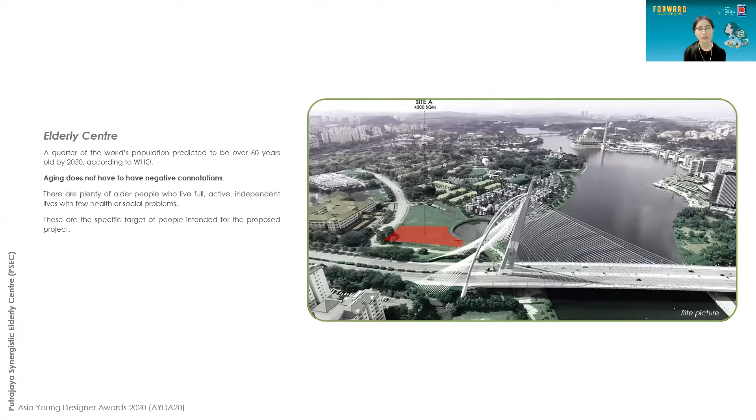A quarter of the world's population is predicted to be over 60 years old by 2050, according to WHO. But aging does not have to have negative connotations. There are plenty of older people who live full, active, independent lives with few health or social problems. These are the specific target of people intended for the proposed project.

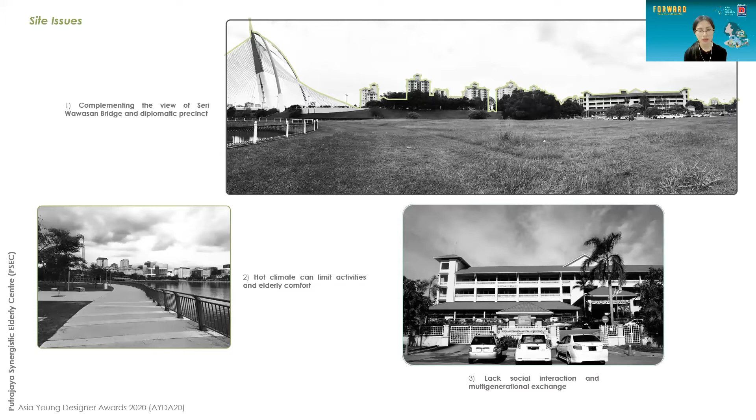The site is located at Putrajaya, overlooking Seri Wawasan Bridge and the diplomatic precinct of Putrajaya. The site issues are how to complement the view of Seri Wawasan Bridge and the diplomatic precinct, the hot climate which can limit activities and hinder elderly comfort, and the lack of social interaction and multi-generational exchange within the site.

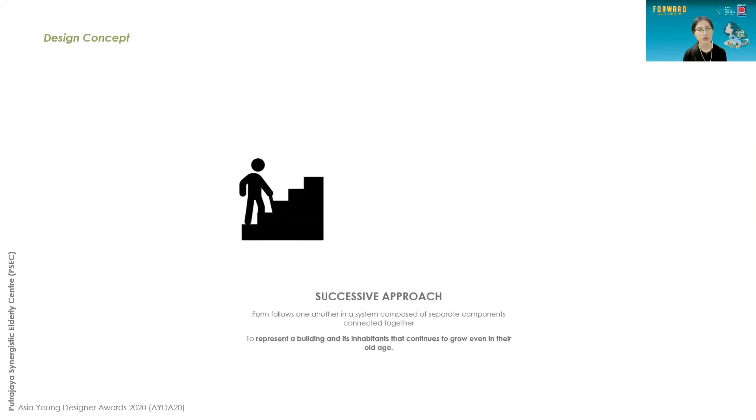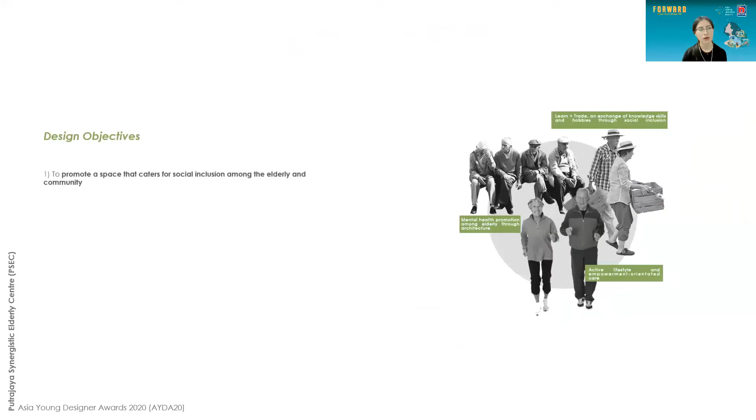The design concept is to have a successive approach in which form follows one another, in a system composed of separate components connected together. This represents a building and its inhabitants that continue to grow even in their old age. The design objectives are to promote space that caters for social inclusion, to promote active aging, and to promote empowerment-oriented care by defining an inclusive program which consists of the active spaces, learn and trade, and the clubhouse program.

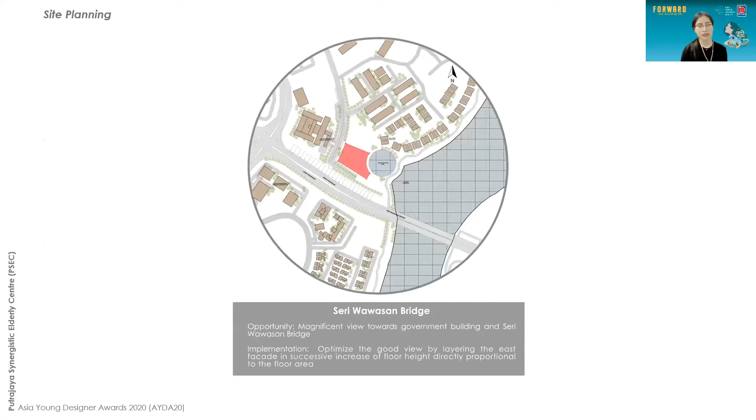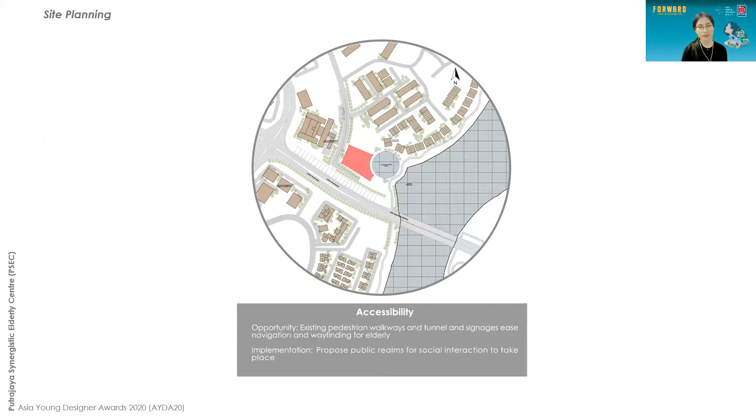The site planning starts off by optimizing the good view by layering the east facade in successive increase of floor height. Then we propose public realms to complement the existing pedestrian walkways, tunnels, and signages. Then we propose ground floor parking for ease of access and convenience.

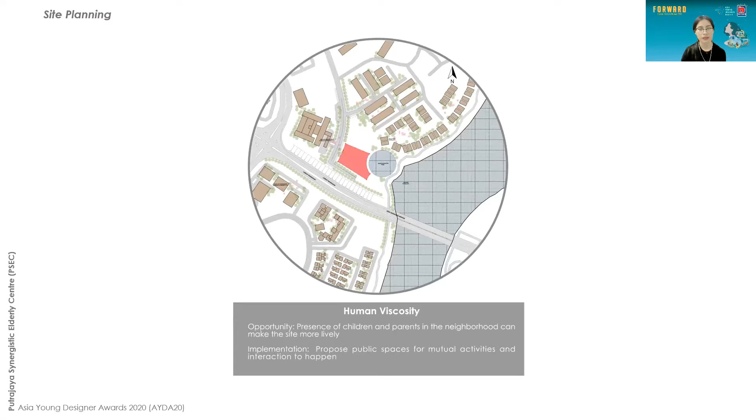Then we propose public spaces for mutual activities, because we have this presence of children and parents in the neighborhood, and this can be a very good opportunity to make the site more lively. We just have to provide a space for that to happen. Lastly, we propose planting more trees in the surrounding area and also on top of the roof.

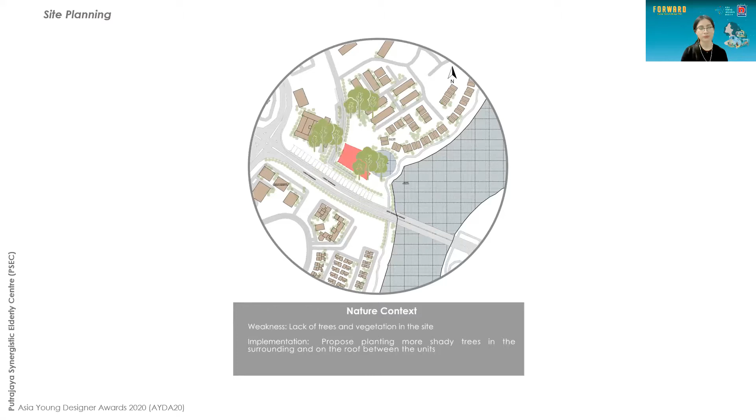The massing development starts by zoning two-fifths of the volume for elderly residences and three-fifths for social spaces and public spaces. Then we apply successive stacking by layering the east facade. Then we have this units division to accommodate for residential units.

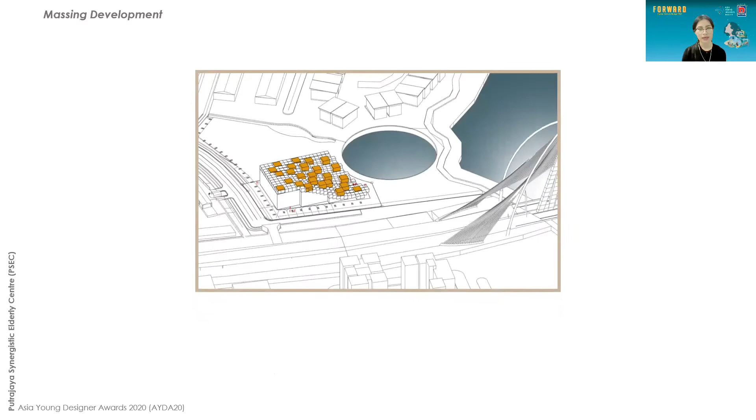Then we implement a curved surface for jogging and walking track implementation, and on top of that surface, we have units dispersion. Lastly, a green roof to incorporate nature into the inhabitants' lives.

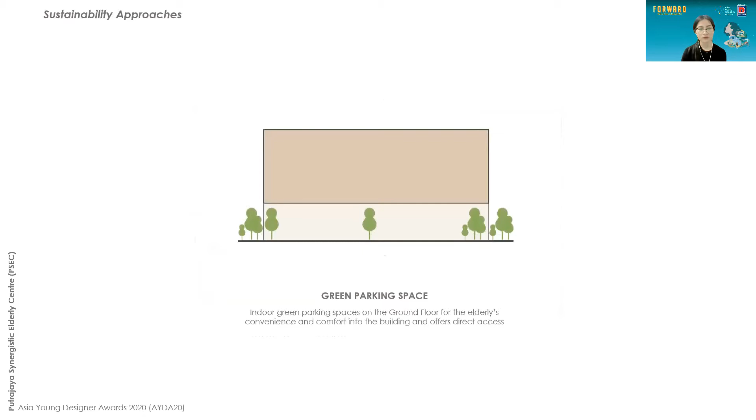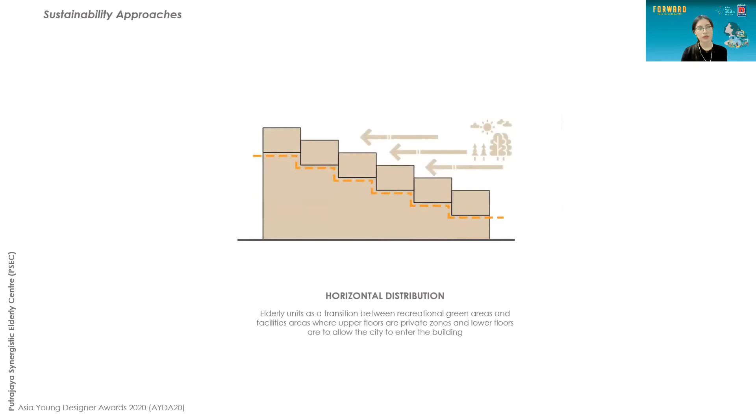The sustainability approaches include a green parking space for convenience and comfort into the building, offering direct access. The slope roof is to maximize roof area for interactive spaces. There is separation of the private residences and the public spaces on the lower floors by horizontal distribution, and rainwater harvesting is one of the approaches.

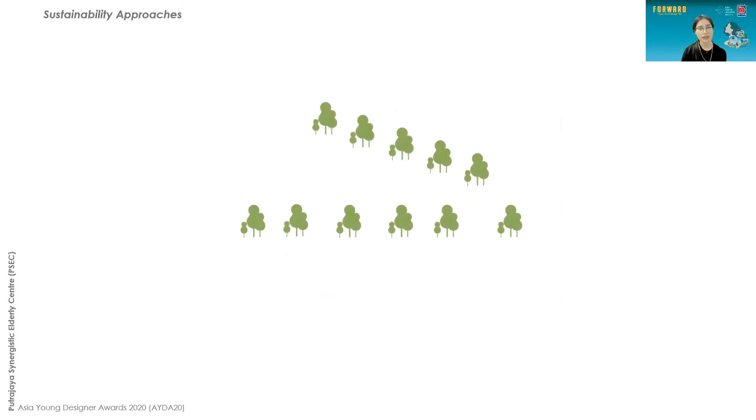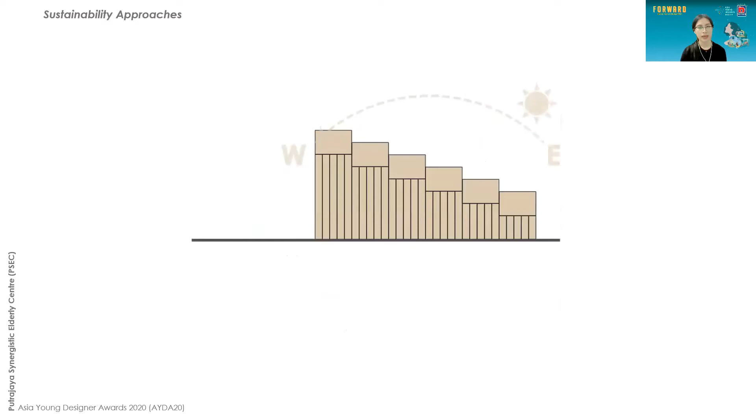The greenery's implementation is not just for natural shading, it's also to regulate the heat of the internal environment of the building. Then the proposed zigzagging curtain wall is to further aid the building's energy efficiency and for solar shading.

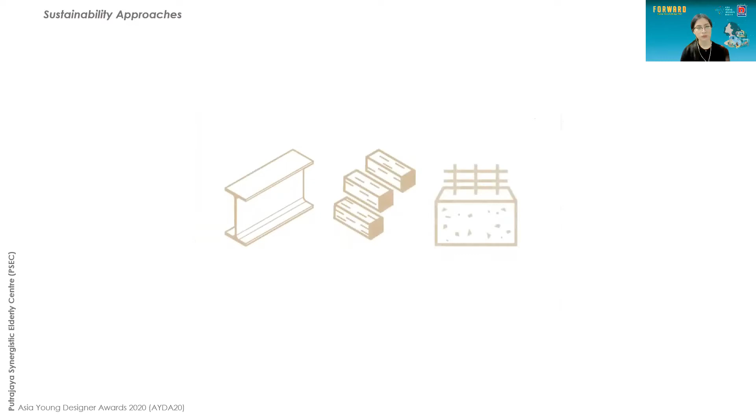The materials used are materials that are robust and durable. Then we have the prefabricated units that sit on top of the concrete structure.

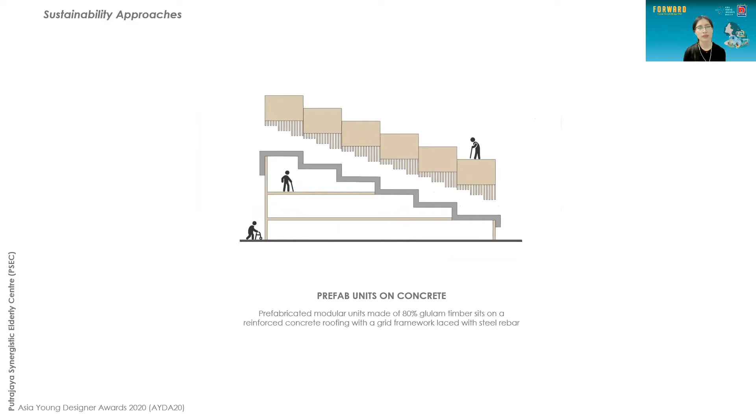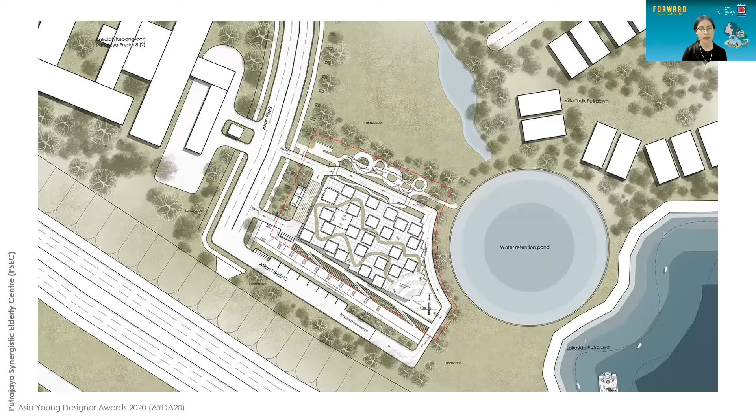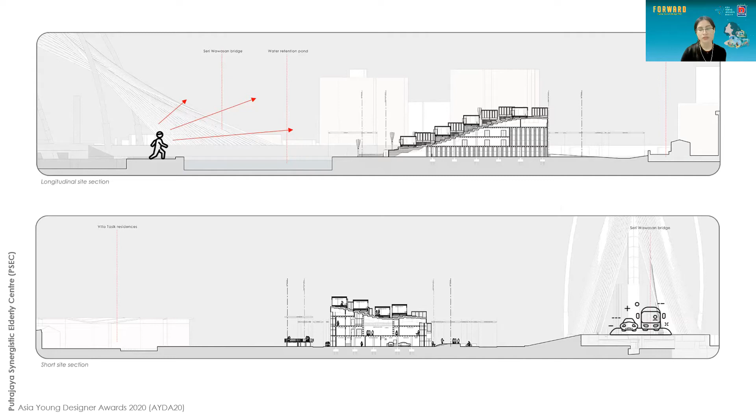So in case of traffic jams, or for people walking there, this is the view that they can see of the building. And this is the view from across the lakeside.

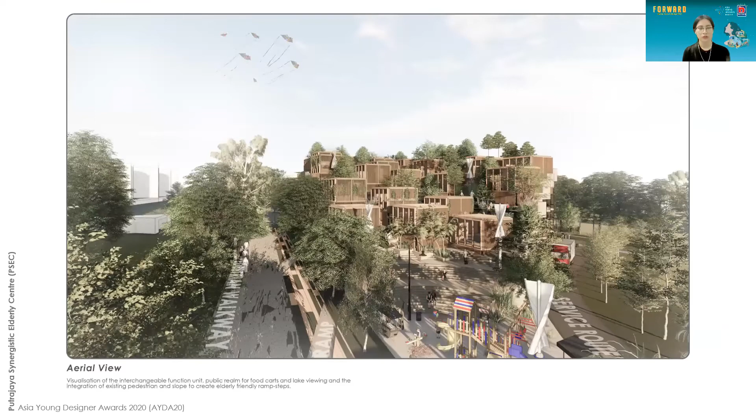This is the aerial view that shows you the ramp staircase and then the amphitheater staircase for social spaces, gatherings, and public realm. And this is the horizontal aerial view.

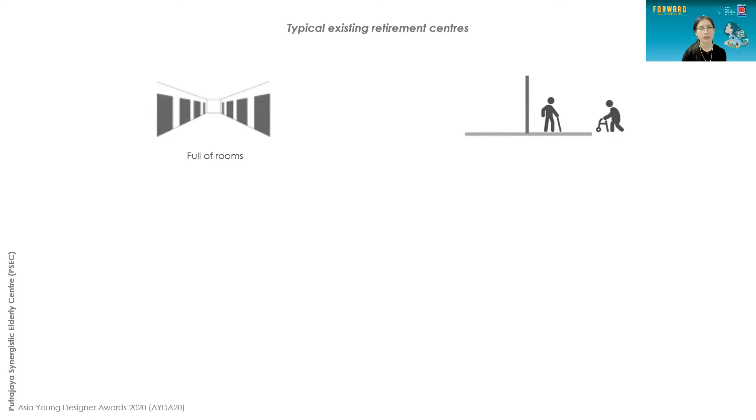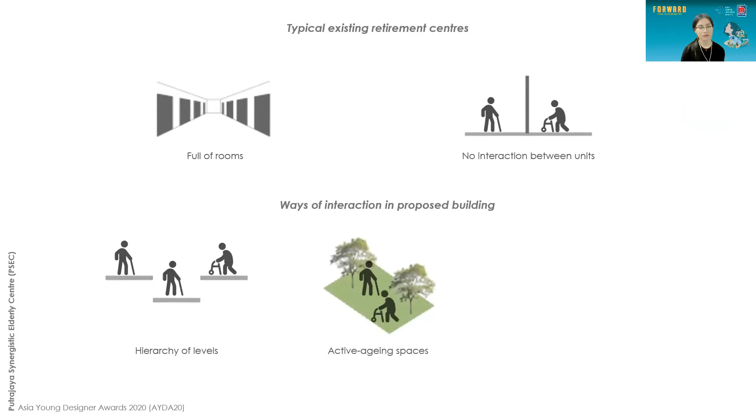A typical existing retirement center is full of rooms with no interaction between units. So the ways of interaction in this proposed building is to have a hierarchy of levels and many active aging spaces and green spaces in between units for them to socialize.

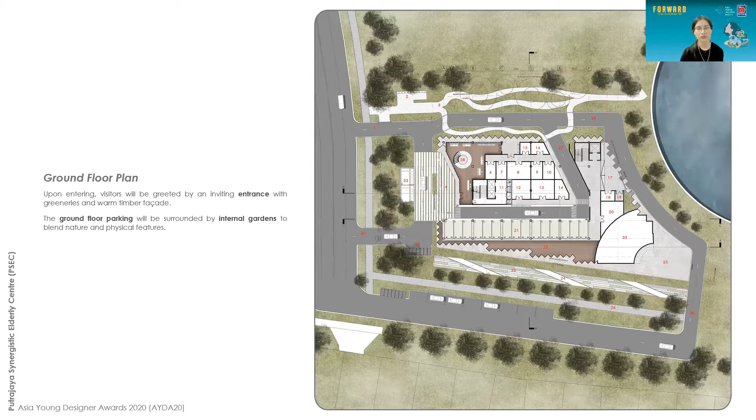This is the way for visitors to go in and out, and this is for visitors to access the ground floor parking and exit. This one shows you the services route for the entire building.

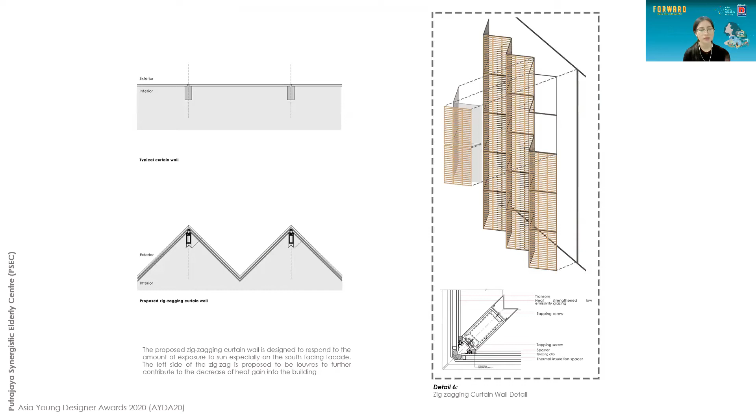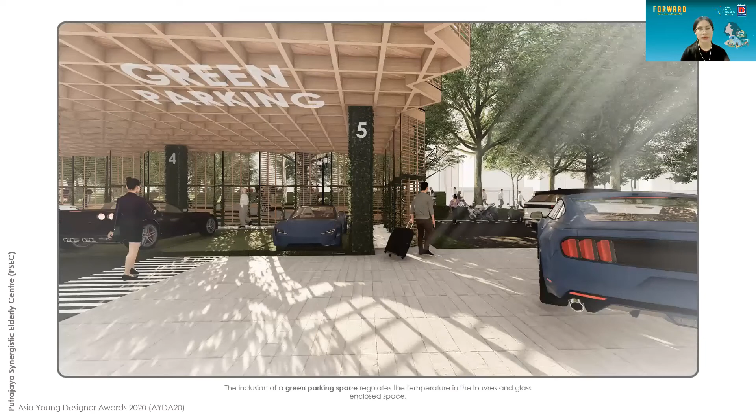The proposed zigzagging curtain wall is designed to respond to the amount of exposure to sun, especially on the south-facing facade. This is the spacious entrance that caters for a cycling path and shaded pedestrian walkways, including a green parking space and a ramp staircase for people with different abilities.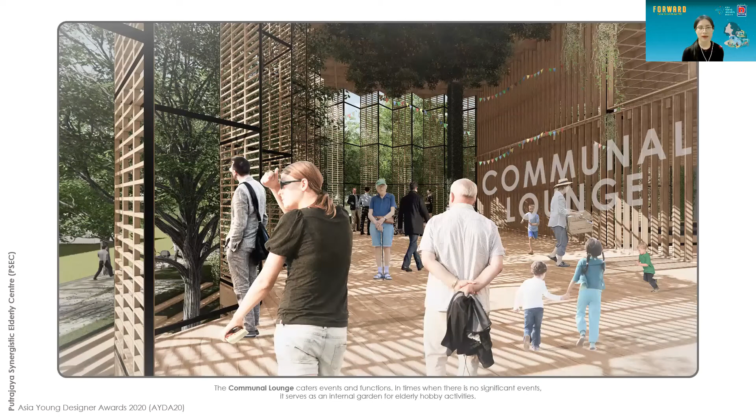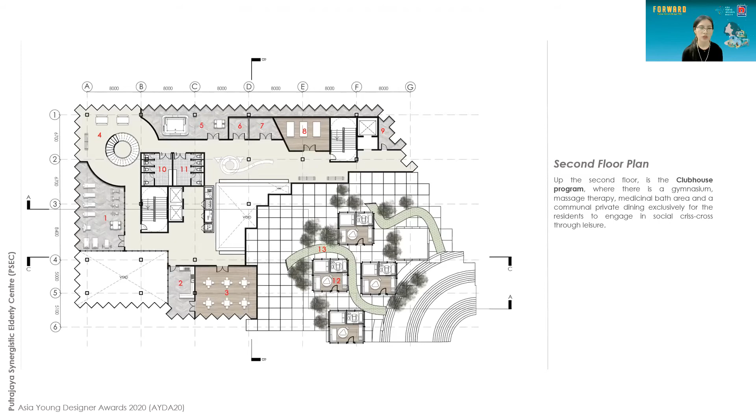On the second floor plan, we have the gymnasium, the massage therapy area, the medicinal bath area, and a communal private dining. This level is mostly used for leisure and entertainment purposes. This is the communal dining for people to bond over coffee and food.

Lastly, the fourth floor plan shows the implementation of the jogging and walking track that sits between these units to encourage spatial and social participation and interaction.

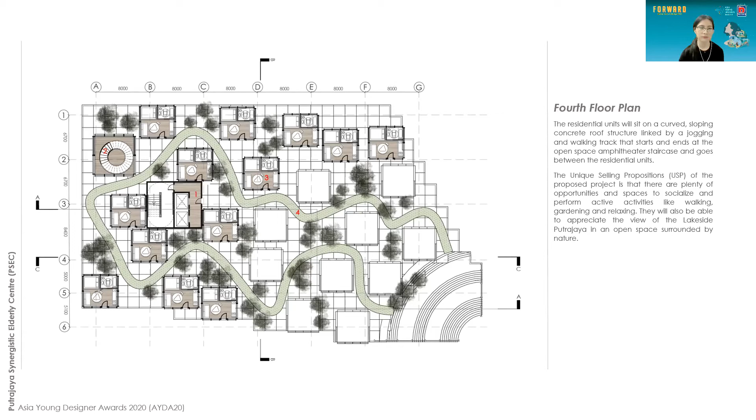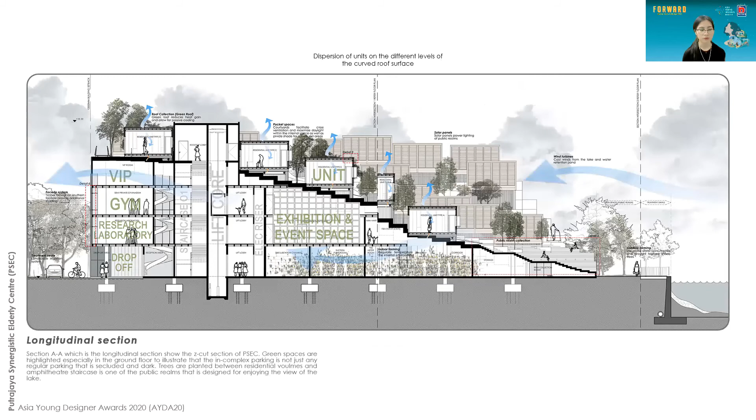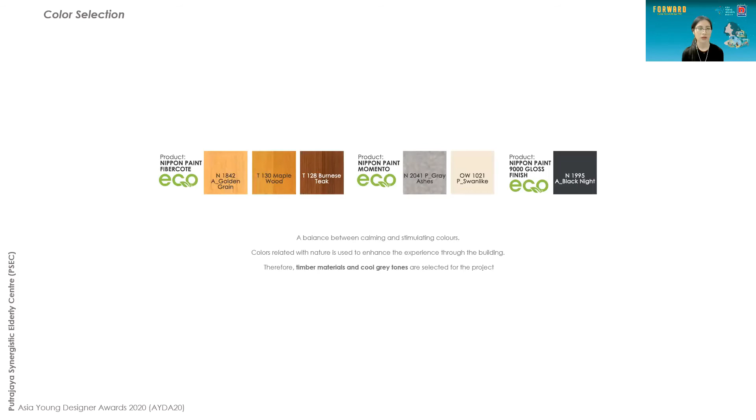Lastly, the color palette selection is a balance between calming and stimulating colors. Colors related to nature are used to enhance the experience through the building. Therefore, Nippon Paint's timber materials and cool gray tones are selected for the project.

In a nutshell, my project aims to promote active aging and empowerment-oriented care in its program and form, to represent a building and its inhabitants that continues to grow even in their old age.

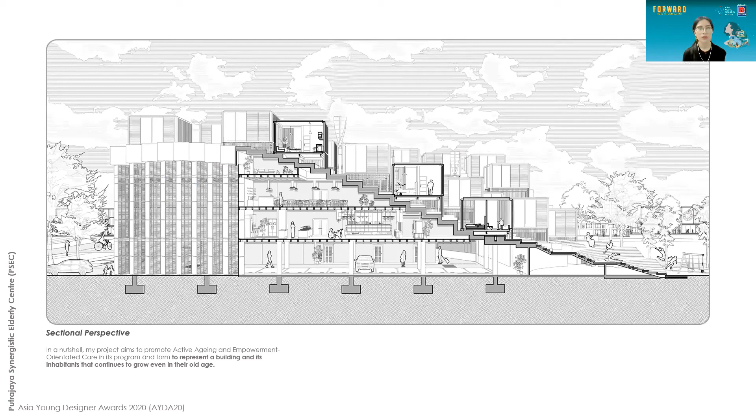I think elderly and retiree homes and centers are not supposed to be designed in such a way that they look very dull and gloomy, signifying the end of someone's life. It should be designed very sophisticatedly with a lush and luxurious outlook.

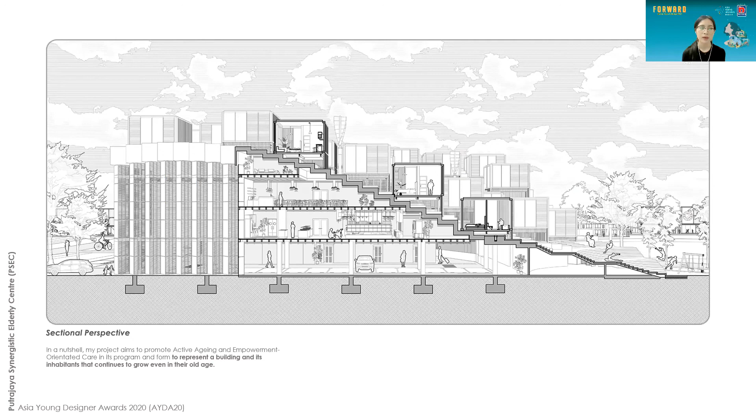These people have been contributing to society for years, so I think they deserve a place that can also be looked up to. This is the kind of place and building that my elderly relatives would love to live in.

Bjarke Ingels once said, we should design our world so that we have positive social and environmental side effects.